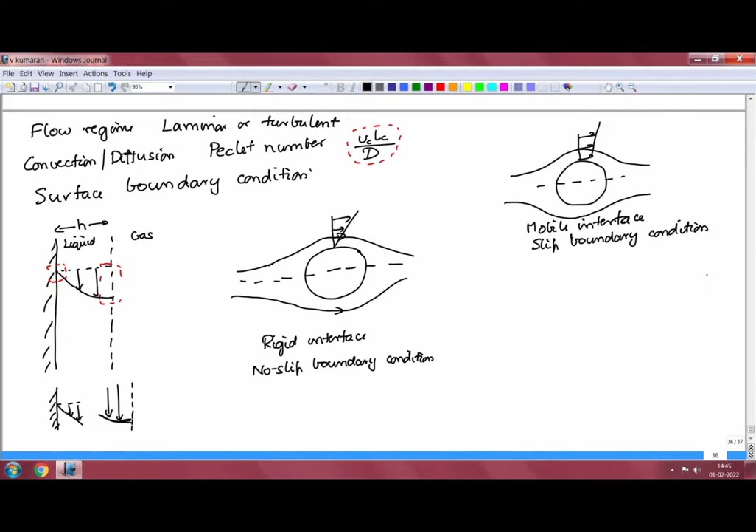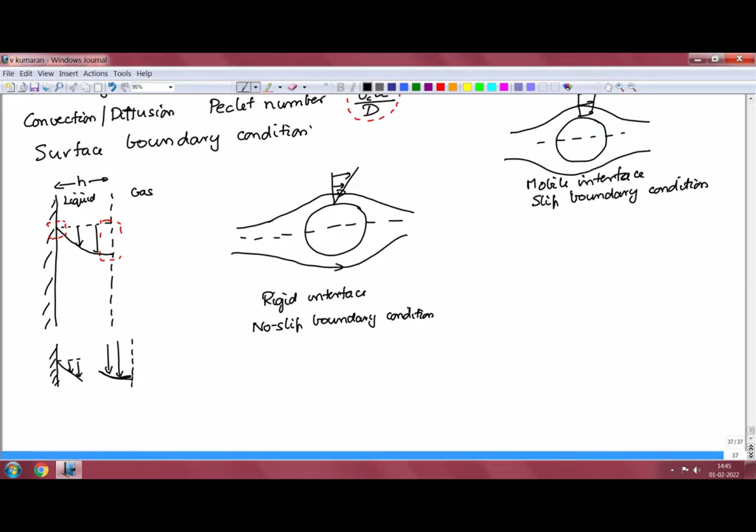And the other thing that affects these transport coefficients is the flow regime, whether it is a laminar or turbulent flow, the ratio of convection and diffusion through the Peclet number, and surface conditions at the boundaries. So, using these now we can examine the forms of the correlations in different regimes.

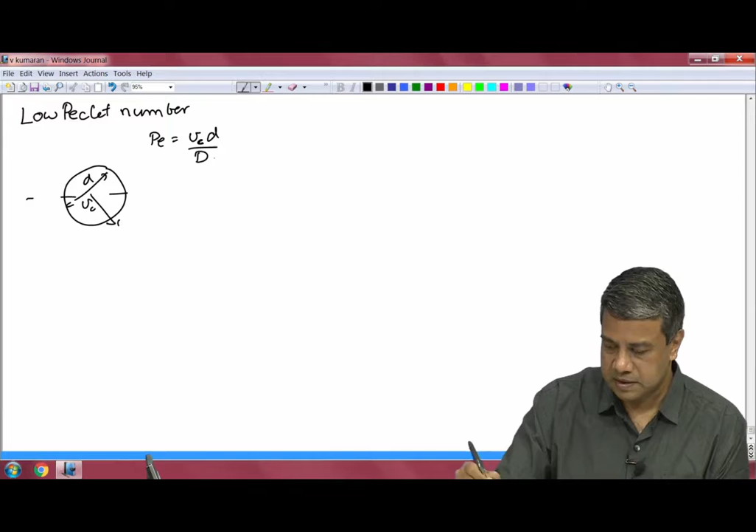The first regime is what is called the low Peclet number. For a particle, for example, which has a fluid flowing relative to it with some characteristic velocity v and a diameter d, the Peclet number is equal to v characteristic times d, divided by D for mass, and the characteristic velocity times the diameter, divided by alpha for thermal.

If the Peclet number is small, that means that the transport is primarily due to diffusion. The velocity does not matter, the velocity is not relevant for this case. And since the velocity appears in the Reynolds number, then the Peclet number, the Reynolds and Peclet number are also not relevant parameters.

And since there are no dimensionless parameters that do not contain velocity, you have to come to the conclusion that the Nusselt number or the Sherwood number are both equal to constants in the diffusion dominated regime. Because in the diffusion dominated regime the velocity does not matter, therefore the Nusselt and Sherwood numbers have to be constants. The constant depends of course on the shape of the object, the particular geometry.

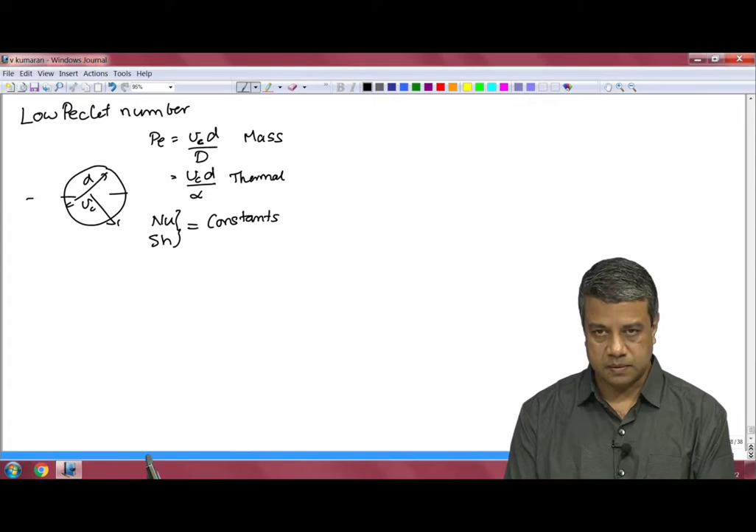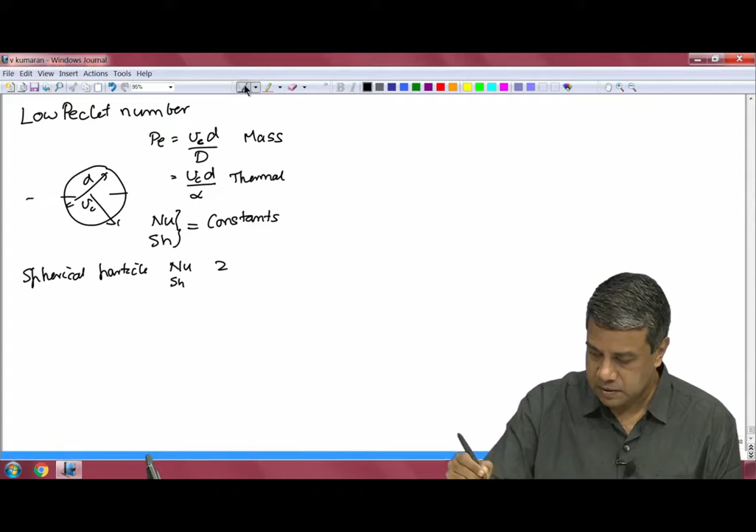For a spherical particle, you can show that the Nusselt or the Sherwood number is equal to 2, in the limit of low Peclet number. For other shaped particles you have to actually calculate the Nusselt or the Sherwood number. So those are the correlations in the limit of low Peclet number.

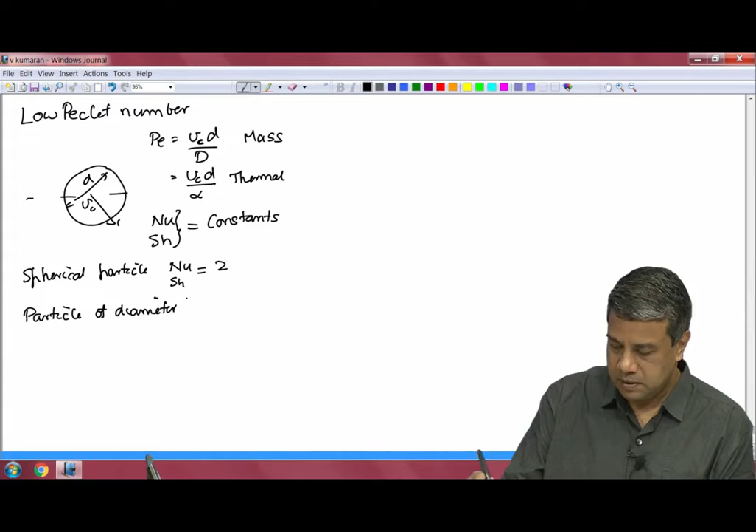And because the diffusivity is the only parameter in the problem, in many cases where the transport is entirely diffusion dominated, you can estimate the time for transport just based upon the diffusivity and the diameter alone. So for example, if I consider a particle of diameter d that is saturated with water, and it is exposed to air, so you wet a particle and expose it to air, you can ask what is the time taken for the particle, let us say 95% of the water, to evaporate.

Okay, let us say it takes 10 seconds for 95% of water to evaporate for a 1 millimeter particle. How much will it take for a 1 centimeter particle? How do you estimate that?

The way to estimate that is to just look at dimensional analysis. The only parameters that are relevant are the diffusivity and the diameter of the particle. This of course assumes that the rate limiting step in transport is actually the transport of moisture from the surface into the air.

So if you are drying it in dry air, which has zero moisture content, the saturation moisture content at the surface is determined entirely by the temperature of the particle. So if you keep the temperature constant, the saturation concentration at the surface is the same independent of particle diameter. So if that saturation concentration is the same, then the time required for drying can depend only upon the diffusion coefficient and the diameter.

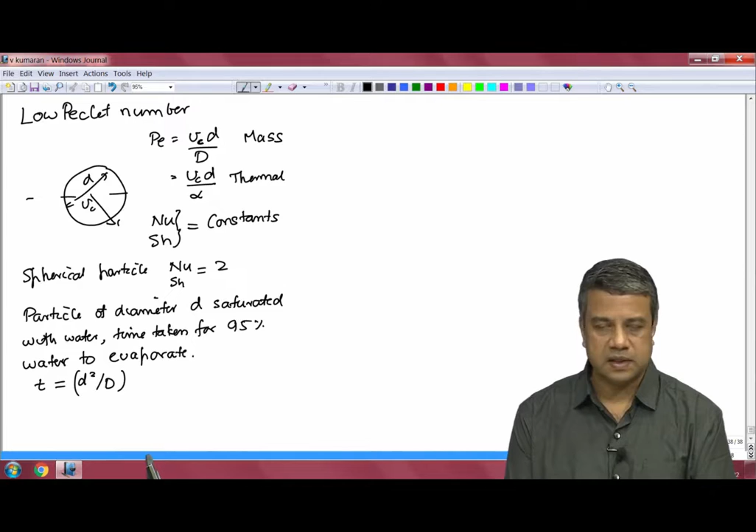And if you increase the particle size by a factor of 10, then the drying time will increase by a factor of 100. So that simple relationship between the drying time can be inferred quite easily just from dimensional analysis in the low Peclet number limit, because the velocity is no longer a parameter. The only parameter is the diffusion coefficient and the diameter. And all of these, the Nusselt number and the Sherwood number, have all got to tend to constant values in the limit of low Peclet number, because convection is not important.

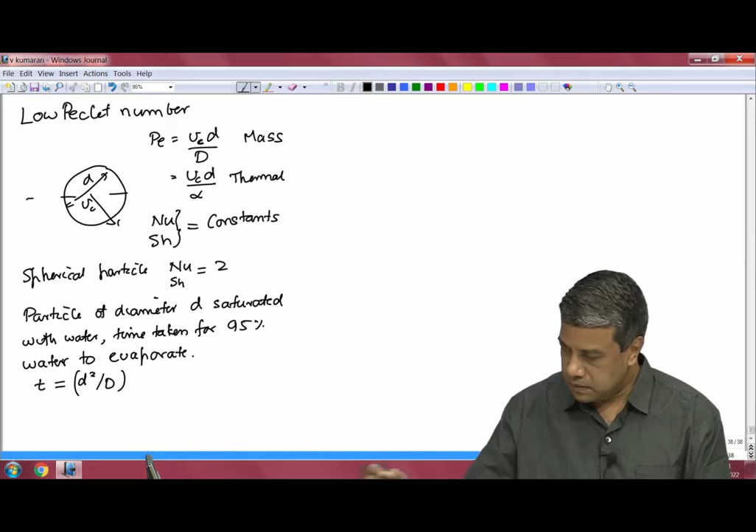Now let us look at the other case of high Peclet number. In the limit of high Peclet number, of course, there is the distinction between laminar and turbulent flows, but also there is a distinction between low and high Reynolds number. Before I go on to that, I should say that this low Peclet number regime is not really important for flow in conduits.

The reason is as follows. For flow in a pipe, for example, the Peclet number can be written as V average d by alpha, or d. Let's just take it for heat transfer. We'll take it as V average d by alpha,

where alpha is the thermal diffusivity. Now, if there is heat transfer taking place in a pipe of diameter d, the time required for heat or mass diffusion across a distance d, from dimensional analysis, has to be equal to d square by alpha. From dimensional analysis, the diffusion time across a distance d, across the pipe, if d is the pipe diameter, is the diffusion time across the pipe diameter.

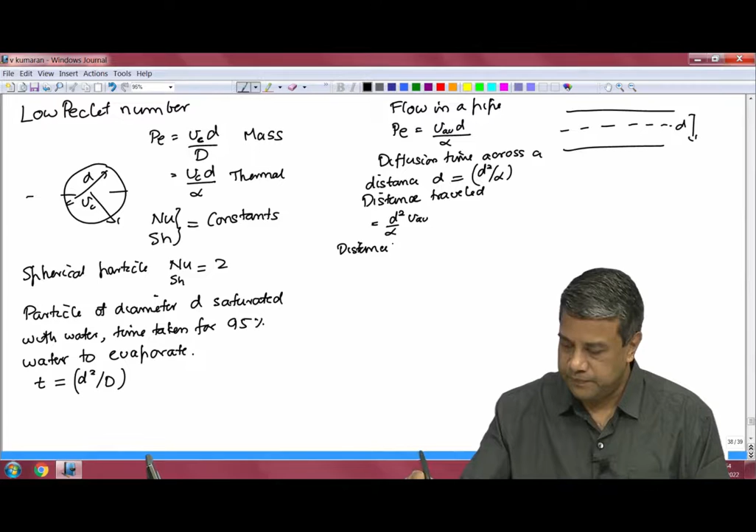And this distance travelled divided by pipe diameter will be V average into d by alpha. This is small when Peclet number is small, because this thing is just the Peclet number itself. So this is small when the Peclet number is small. So basically the temperature is equalized across the entire pipe when the fluid has travelled only a fraction of the diameter. So there is no advantage to having a long pipe for heat transfer and trying to pump fluid through it, thereby incurring a high energy cost for pumping the fluid.

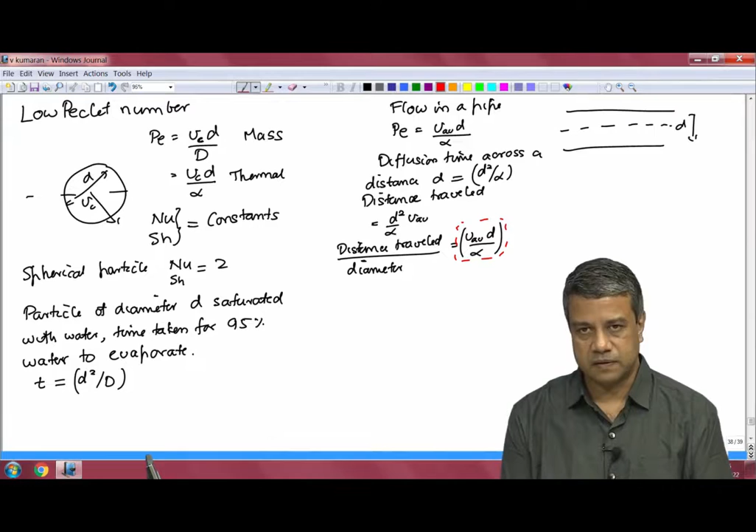The low Peclet number regime is not really of importance in internal flows such as flows through a pipe, because at low Peclet number the heat transfer takes place over a distance that is a fraction of the diameter of the pipe itself. So there is not much use in having a long pipe for heat or mass transfer in internal flows. That is the reason the low Peclet number regime is not really relevant in internal flows.

So now consider high Peclet number. You could have two regimes: one is low Reynolds number, and the other is high Reynolds number.

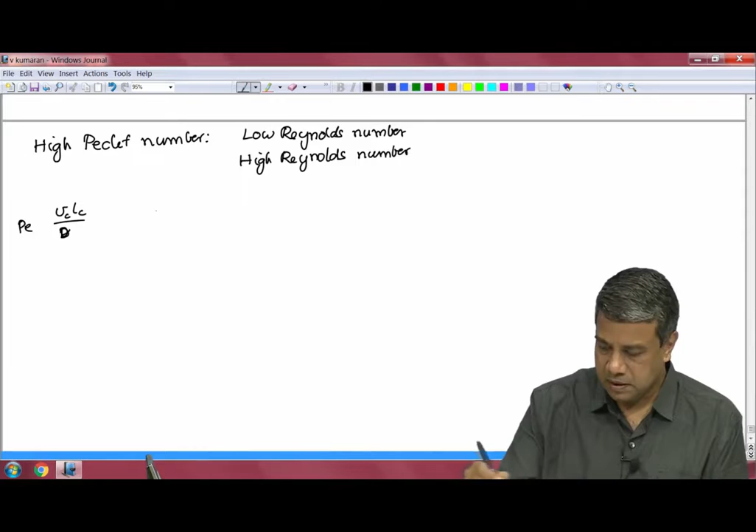Note that the Peclet number is V times characteristic length divided by the diffusion coefficient, and the Reynolds number is V times characteristic length divided by the momentum diffusion coefficient. This diffusion coefficient is either the mass diffusion coefficient or the heat diffusion coefficient, and the Reynolds number is the same parameter with the momentum diffusion coefficient substituted for the mass or heat diffusion coefficient. When we discuss diffusion next, we will see that the mass, heat and momentum diffusivities in gases are all approximately the same.

They are all comparable to each other, and therefore if the Peclet number is large, the Reynolds number will also be large. So in the case of gases at high Peclet number, invariably the Reynolds number will also be high, because the mass, heat and momentum diffusivities are comparable in gases.

On the other hand, in liquids we will see that the mass diffusion coefficient is actually much smaller than the momentum diffusion coefficient for mass transfer. Similarly, in liquids the thermal diffusion coefficient could be either smaller or much larger than the momentum diffusion coefficient. We will see this next when we actually estimate the diffusion coefficients.

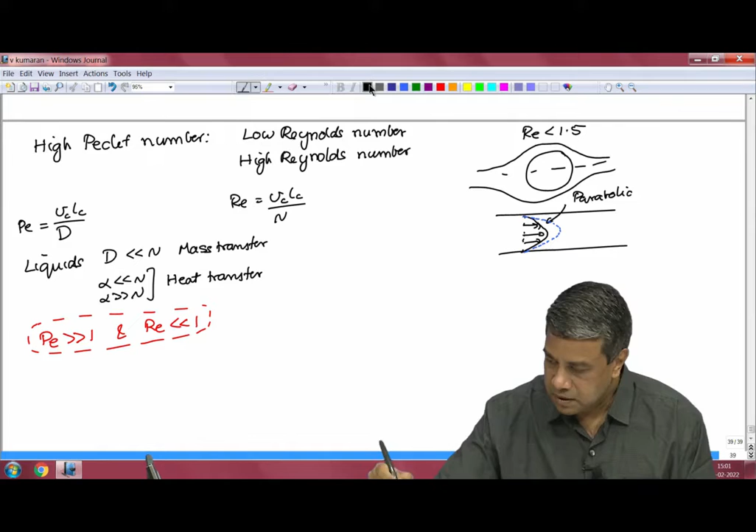In other words, the form of the velocity profile will be exactly the same, even though the velocity itself has increased. So for example, if you divide the velocity at any point by the maximum velocity, it is going to be the same at each point within the pipe. If I take a particular location in the pipe and divide the velocity at that location by the total velocity, that ratio will be the same, independent of the flow velocity.

For the flow around a particle, if I take the velocity at any point within the flow and divide it by the free stream velocity, that ratio stays the same as the velocity is increased. So as I keep increasing the free stream velocity, the velocity at every point around the particle increases, but the ratio of that velocity to the free stream velocity remains the same. In other words, the form of the velocity profile is unchanged even though the velocity changes, and because the flow pattern is unchanged, the effect of convection can be represented by only one characteristic velocity.

The nature of the velocity profile remains the same as the Reynolds number increases, which means one characteristic velocity can represent the strength of convection. If you define the Peclet number with respect to that velocity, the transport coefficients should depend only upon that Peclet number because of linearity.

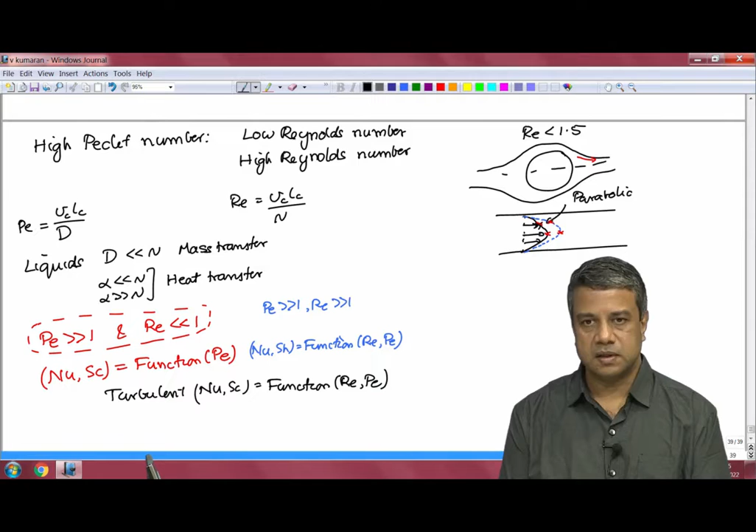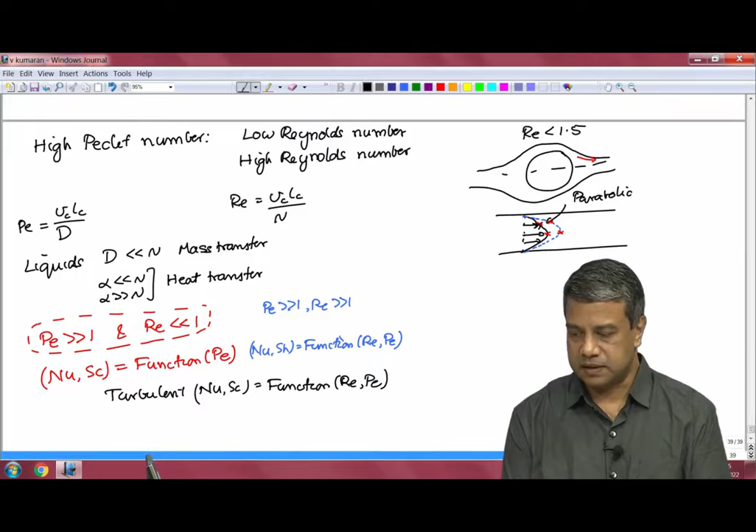I have written these in terms of the Reynolds number and the Peclet number. You could write them in terms of Reynolds number and Prandtl number using the substitution Peclet number equals Reynolds number times Prandtl number, which is a straightforward extension. So with this basic background on the nature of the correlations, let us look at correlations for some specific cases.

First, I will consider flow in a pipe, and give you the Nusselt number correlation in this case. The Sherwood number correlation can be derived by just substituting the mass Peclet number for the heat Peclet number in the correlation. For a laminar flow...

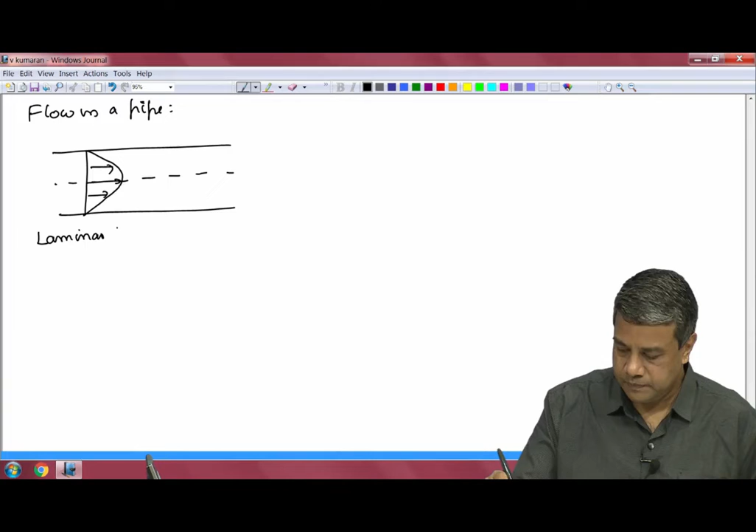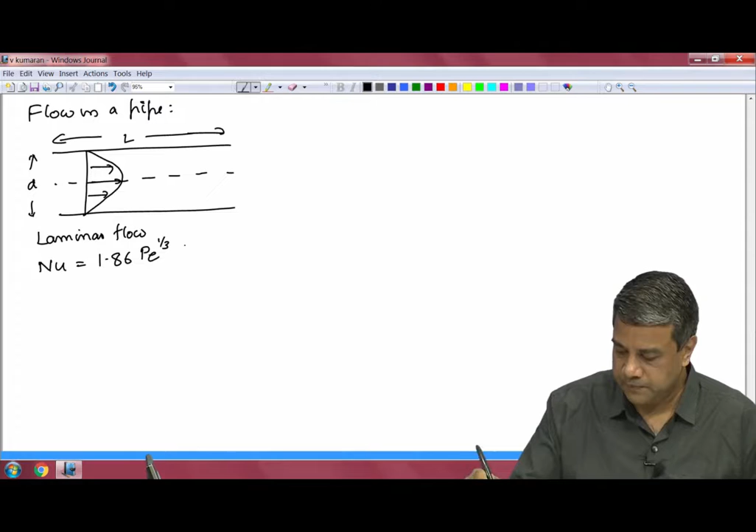If we consider a pipe with diameter d and length L, for a laminar flow, the Nusselt number is given by the correlation: Nu equals 1.86 times Peclet number to the power 1/3, times d by L to the power 1/3. It is commonly written as 1.86 Re to the power 1/3, Pr to the power 1/3, d by L to the power 1/3.

So this depends upon the length to diameter ratio as well as the Reynolds number and the Prandtl number. And in the case of heat transfer, there is often a correction factor for the viscosity added: mu by mu w to the power 0.14.

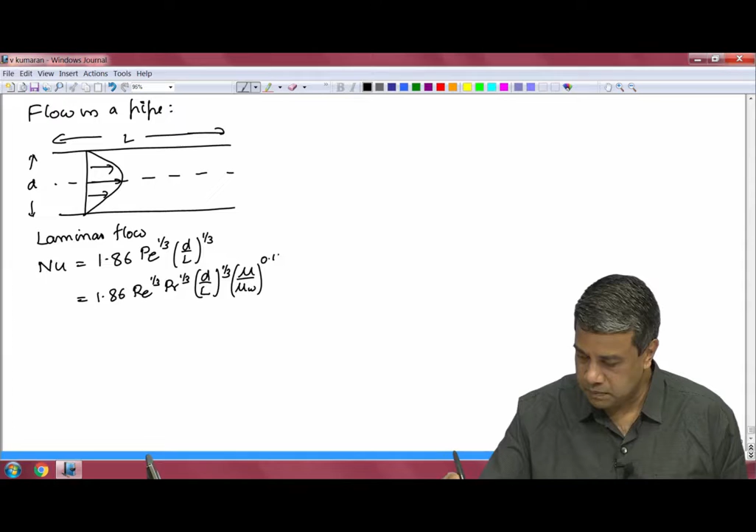0.14, where mu is the viscosity of the fluid at the average temperature of the fluid, mu W is the viscosity of the fluid at the temperature of the wall. So, in cases where the viscosity varies with temperature, you have to include a correction factor, and that correction factor is usually included as mu by mu W to the power 0.14.

So, this is the correlation for a laminar flow. We will examine this correlation later on, and we will show that this entire correlation, the form of the correlation with the exception of the prefactor, can actually be derived using what is called boundary layer analysis later in the course. So up to that point we can derive it using boundary layer analysis. And this 1/3 power also we will examine why there is a 1/3 power.

As I said, this is applicable for Peclet number large compared to 1, laminar flow. I told you that the Peclet number small compared to 1 regime is not actually relevant for the flow in a pipe.

For a turbulent flow, you have a similar correlation. Nusselt number is equal to 0.023 Re to the power 0.8, sorry, PR to the power 1/3 and mu by mu W to the power 0.14. This is the correlation for a turbulent flow in a pipe.

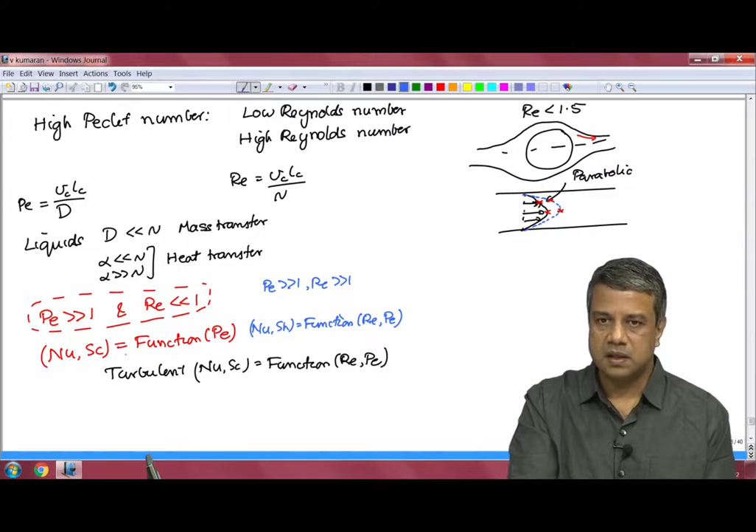So far I have discussed what are the high Peclet number limit, the low Peclet number limit where the Nusselt and Sherwood numbers are constant. High Peclet number, if the Reynolds number is low, the Nusselt and Sherwood numbers depend only on the Peclet number, and if the Reynolds number is high, they depend on the Reynolds number and the Peclet number. And I had given you the correlations for a pipe.

So, we will solve an example of the rate of heat transfer in a pipe using this correlation, and then we will proceed to looking at heat and mass transfer for a flat plate, and later on for the flow around a particle. We will continue this in the next lecture. I will see you then.